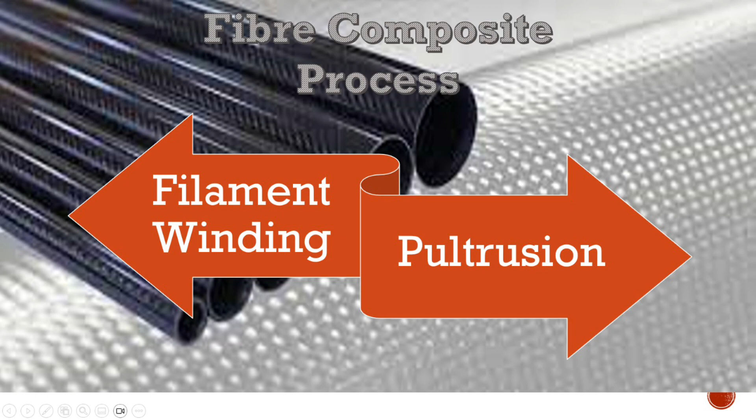There are a few fiber composite processes that can produce fiber composite products, and two of them are filament winding and pultrusion.

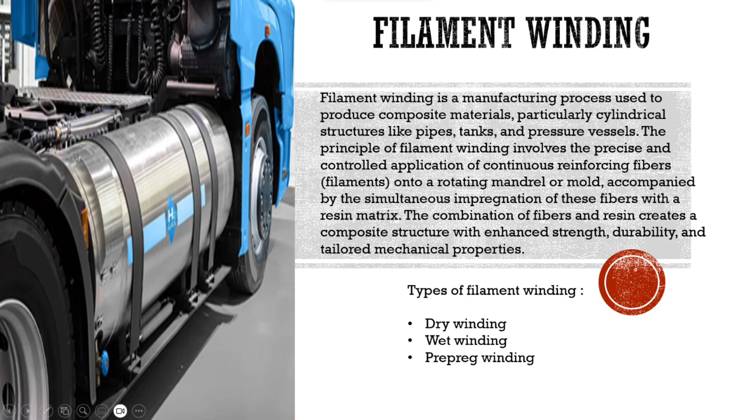Firstly, we will discuss filament winding. Filament winding is a manufacturing process used to produce composite materials, particularly cylindrical structures like pipes, tanks, and pressure vessels. The principle involves the precise and controlled application of continuous reinforcement fiber onto a rotating mandrel or mold, accompanied by simultaneous impregnation of this fiber with a resin matrix. The combination of fiber and resin creates a composite structure with enhanced strength, durability, and tailored mechanical properties.

Next is the characteristic of the product produced from the filament winding method. The product is cylindrical shape with a hollow core due to the fiber wound around the rotating mandrel. Filament winding machines can be designed to accommodate large mandrels, which allows production of large diameter products.

It produces thermoset composite products with unidirectional fiber because the fiber source is a singular direction, which is the guide. Products can have a few patterns such as polar, helical, or hoop, based on the arrangement of the continuous fiber. Each pattern determines the mechanical properties and performance of the final product. Lastly, the product attains excellent dimensional stability through the synergy of reinforcing materials like glass fiber and epoxy resin. This combination ensures the product maintains its shape and dimensions effectively.

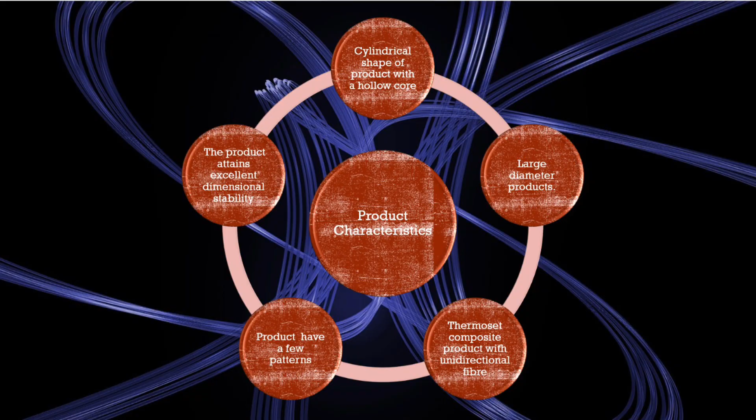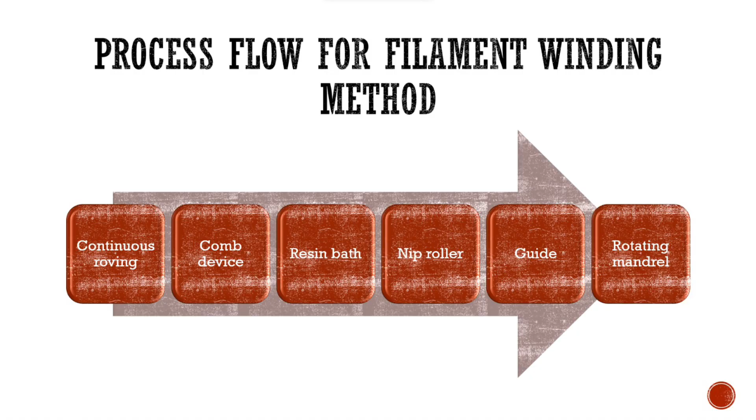This is the process flow for the filament winding method, and the next slide will show you how the process is done. One of the processes used to make tubular products is filament winding.

A filament is a fine strand of material that looks like a thin wire. Filament winding involves pulling glass or polymer fiber strands through a resin tank, then winding the resin-covered fiber reinforcement onto a rotating shaft called a mandrel. As the resin gels and cures, it bonds the fiber filament windings and forms a rigid tube of fiber-reinforced polymer composite on the mandrel. When the resin is fully cured, the mandrel is removed, leaving a polymer composite tube.

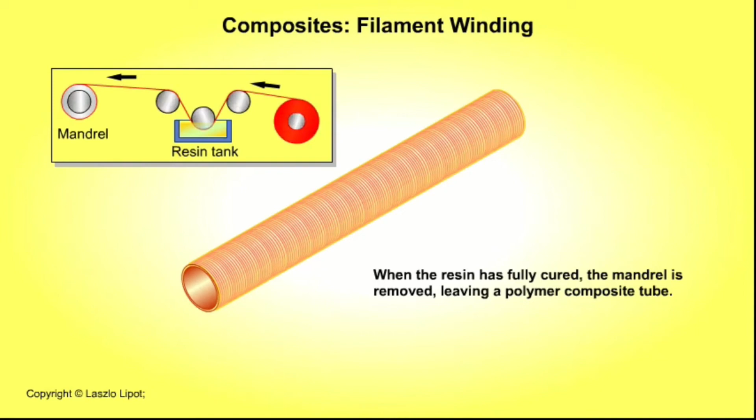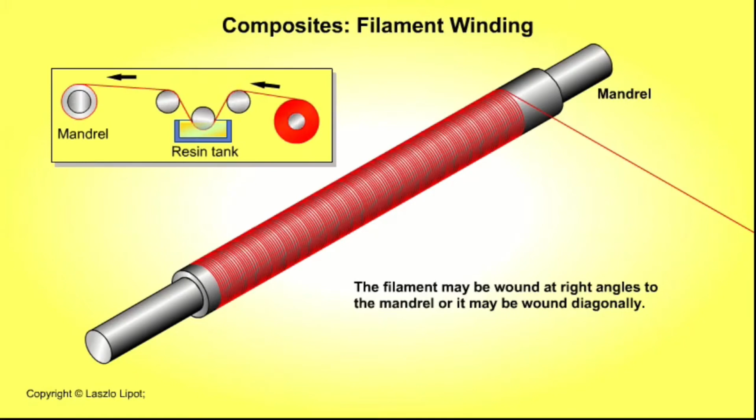However, the use of filament winding method also has its pros and cons. The first advantage is the filament winding technique can be highly automated. High fiber volume laminates can be used in this process, with possibly 60 to 80%, which can contribute to increasing the mechanical properties. It also minimizes material waste as the fiber is precisely placed on the mandrel according to the design requirement.

The properties of filament wound products can be customized by varying the type of filament, resin, and winding pattern. This makes them a versatile material that can be used for a wide range of applications. There is also versatility in material selection because it can accommodate a wide range of materials including various types of fiber such as glass or carbon and resin systems. This versatility allows manufacturers to tailor the composite material to specific performance needs.

The disadvantage of the filament winding method is that it is limited to producing closed and convex structures. It is not suitable for making open structures such as a bathtub. It is also difficult to obtain uniform fiber distribution and resin content throughout the thickness of the laminate, and the product may have contamination due to the open system process.

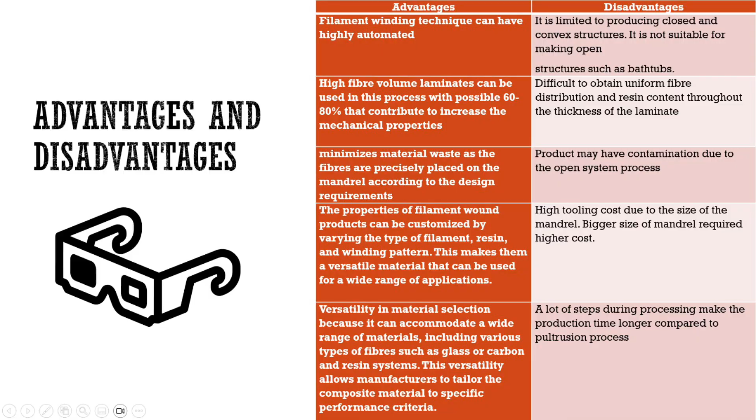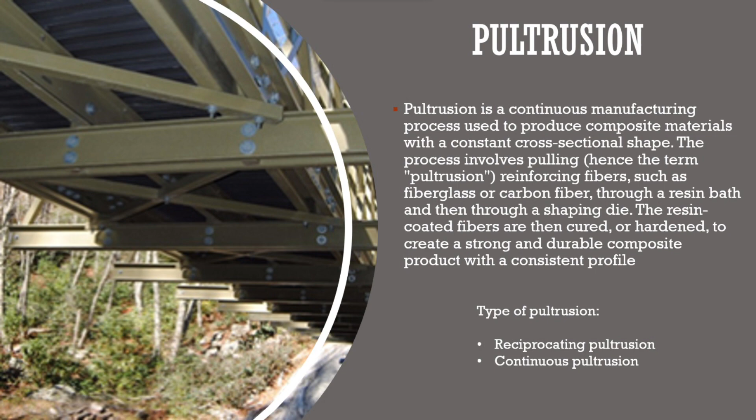The next processing method is pultrusion. Pultrusion is a continuous manufacturing process used to produce composite material with a constant cross-sectional shape. The process involves pulling reinforcement fiber such as fiberglass or carbon fiber through a resin bath and then through a shaping die. The resin-coated fiber is then cured or hardened to create a strong and durable composite product with a consistent profile.

This is the characteristic of product produced from the pultrusion method. The product has a simple uniform cross-sectional structure as it was shaped by pulling and extruding through the shaping die. Final product shape is fully determined by the die shape.

The product is exceptionally lightweight, being 75% lighter than steel, yet it maintains high strength and durability. This is attributed to the natural strength of the reinforcing fiber used, which combines excellent strength with a lightweight composition. Product shape is usually simple as the continuous nature of the process limits the ability to control fiber orientation.

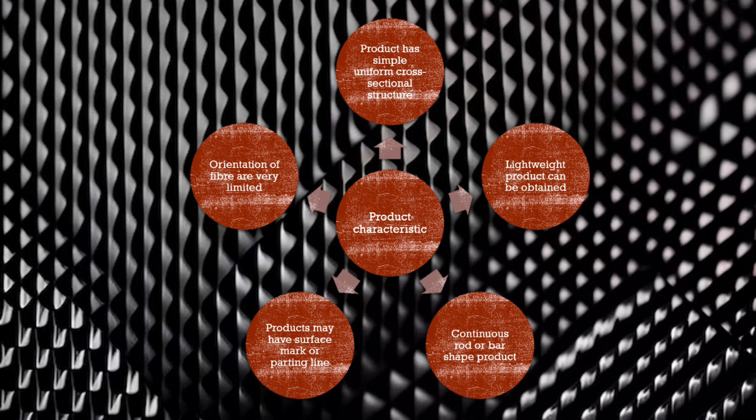It could be a continuous rod or bar shape of product according to the shape of the die used, as the final shape is fully determined by the heated die during processing. The product may have surface marks or parting lines at the joint segment, as some dies are segmented for easy assembly, disassembly, machining, and chrome plating.

This is the process flow for the pultrusion method, and the next slide will show you how the process is done. Unidirectional continuous fibers like glass and carbon are being pulled from the creel stand. Depending on the product type, woven fabrics, mats and surface veils are pulled from the shelves.

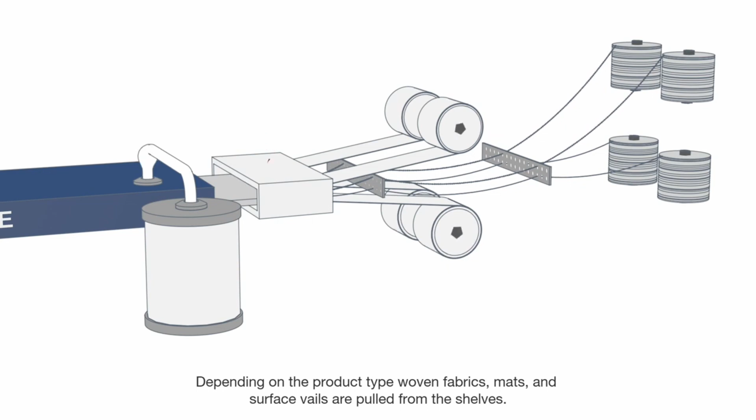The reinforcement package is pulled through a guide where the fibers and woven fabrics are placed precisely in relation to the profile cross-section.

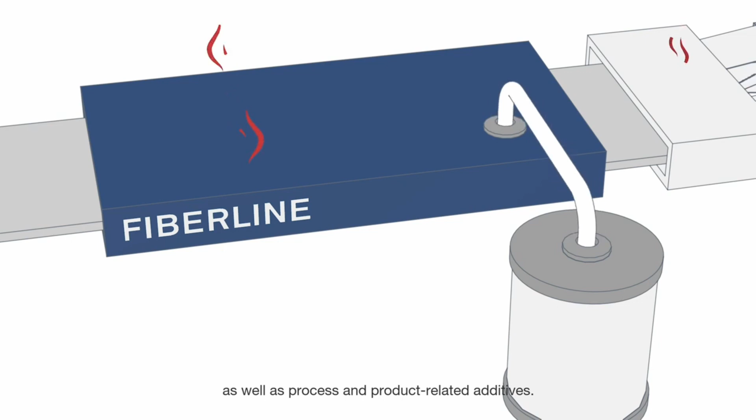When the reinforcement is pulled into the die, the matrix is added by injection. The matrix includes thermosetting polymer resins as well as process- and product-related additives. The injection method is a fully enclosed process that keeps evaporation of solvents at a minimum.

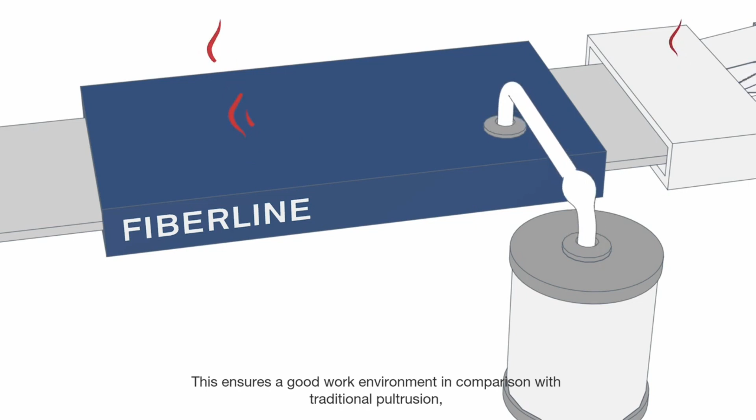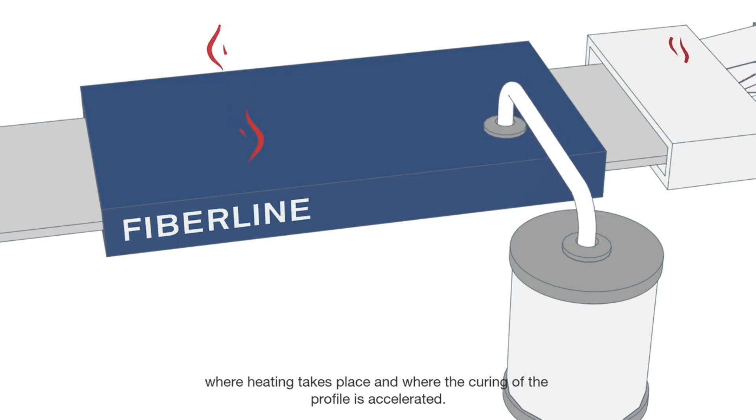This ensures a good work environment in comparison with traditional pultrusion, where reinforcement is led through an open bath containing the matrix. After the fibers are impregnated with the injected matrix, the entire product moves forward to the next zone in the process, where heating takes place and the curing of the profile is accelerated.

The pulling power needed to overcome friction in the processing equipment, and thus the driving force in the process, is provided by pullers placed outside the processing equipment. Pulling can be done by either belts or reciprocating pullers. Depending on the cross-sectional area of the produced profile, pulling forces of up to 50 tons are possible.

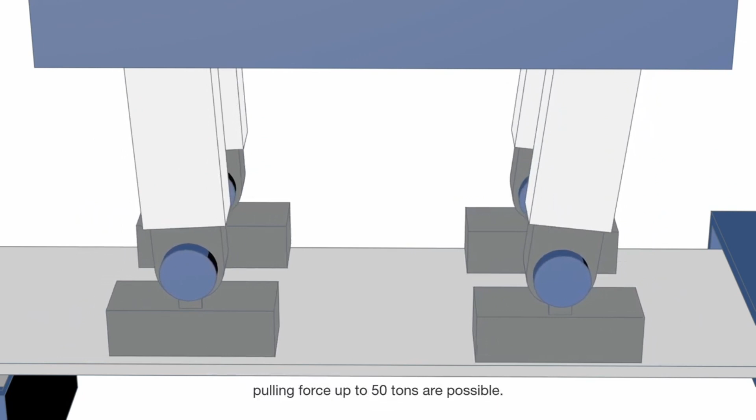During the last phase of the process, the profiles are shortened by a saw mounted to move at the same speed as the profile being pulled out of the die. This ensures a continual process with no stops, even when cutting.

And the last part is the pros and cons of using the pultrusion method. The advantage is fast cycle rate as it is a continuous process and can be completely automated to get the finished part. It is suitable for making high-volume composite parts. It is more secure from contamination compared to filament winding because the resin bath is a closed process. Pultruded composites are perfect for lightweight structural applications because of their remarkable strength and stiffness in relation to their weight.

It produces low-cost commercial goods by utilizing inexpensive fiber and resin processes. Pultruded composites are appropriate for outdoor applications because of their exceptional resistance to corrosion and environmental factor deterioration. They are an excellent option for maritime construction, chemical processing equipment, and building components since they tolerate exposure to moisture, chemical, and UV radiation without losing their integrity.

And the disadvantage is that complex and tapered forms are not possible to create, as it only works well with items that have a consistent cross-section all the way around. Very high tolerance parts on the inside and outside dimensions cannot be produced using the pultrusion process. Structures requiring complex loading cannot be produced using this process because the properties are mostly limited to the axial direction.

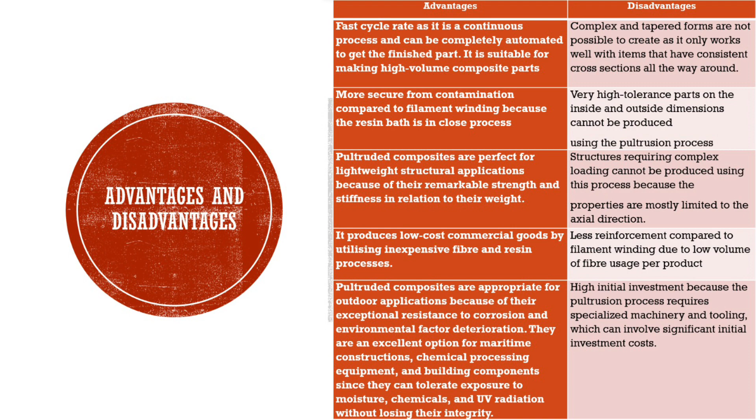There is less reinforcement compared to filament winding due to low volume of fiber used per product. High initial investment is needed because the pultrusion process requires specialized machinery and tooling, each of which can involve significant initial investment. I think that's all for me.